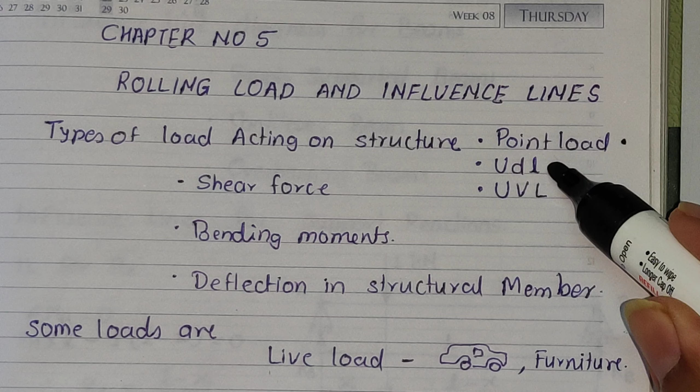Load. UDL, that is uniformly distributed load, right? Load of the tiles, right? That is uniformly distributed load. And UVL, the load whose intensity varies from one point to another point, that is UVL, uniformly varying load, right?

So because of such type of loading, there are different types of reactive forces acting on a beam. In fact, these are the different types of reaction forces induced in a beam, such as shear force, bending moment, and deflection of structural members. Because of loading, that member or beam gets deflected, right?

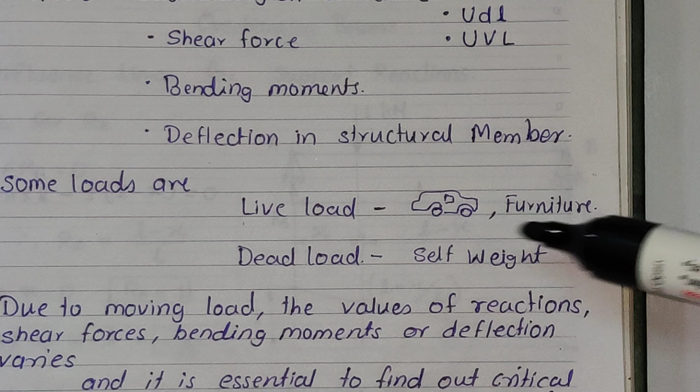Some of the loads are basically also classified, as you can see here, as live load, such as load carried by the vehicles, furniture, etc., and dead load, that is the self weight of the structure itself, right? So again, these loads are classified into two types, live load and dead load. So let us see next.

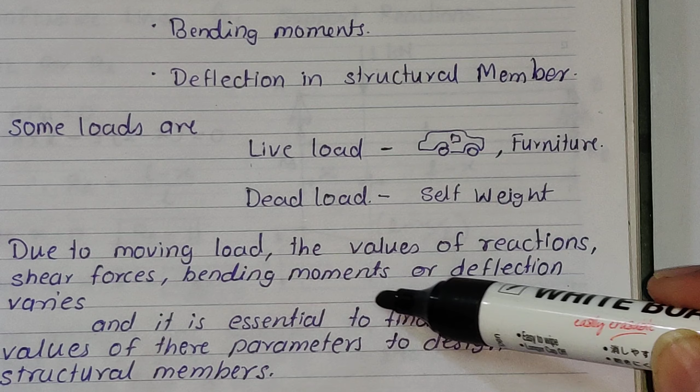Due to moving load from one point to another point, the value of reactions, shear force, bending moment, or deflection varies. Means these values change from one point to another point, and it is essential to find out the critical value of these parameters to design safe structural members.

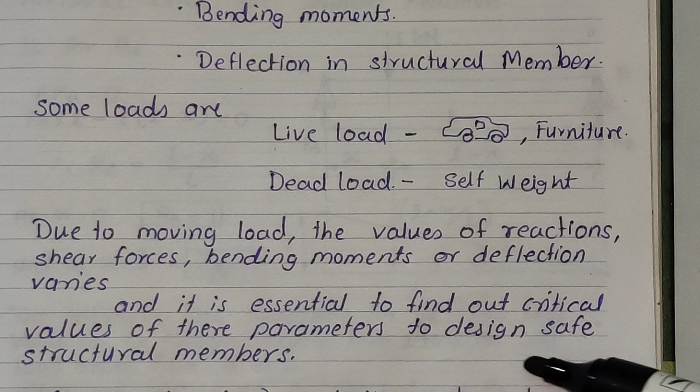So influence line diagram, अभी देखेंगे हम influence lines होती क्या है. As you can see here, influence lines, right? Influence lines or the influence line diagram, these represent the changing value of

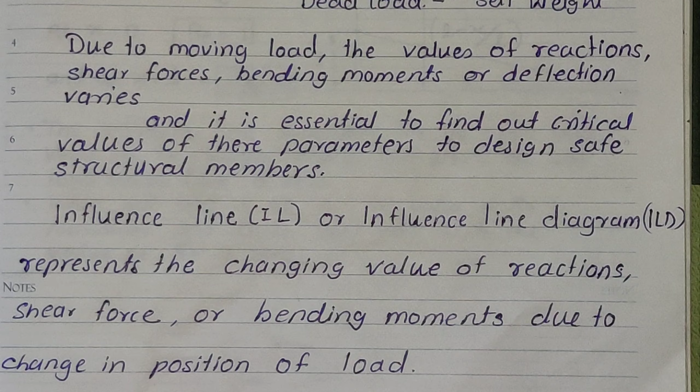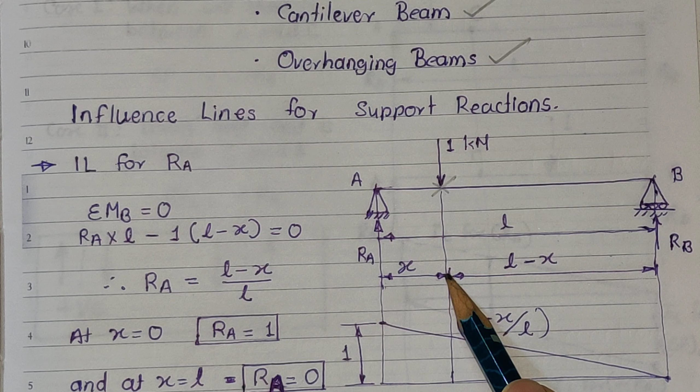So let us start one by one. So now we'll see the influence line diagram for the simply supported beam. As you can see in this diagram, the beam is simply supported. One end is hinged, another end is roller supported, and unit load is acting at a distance x from point A. Right? Total length of beam is L. So if we assume this distance as x, then the remaining distance will be L minus x, right? So this is unit load at this point.

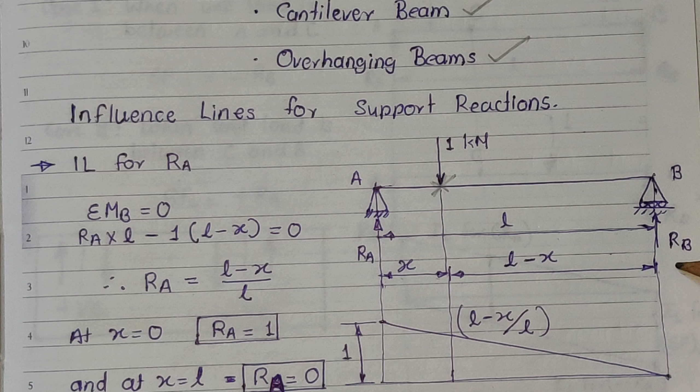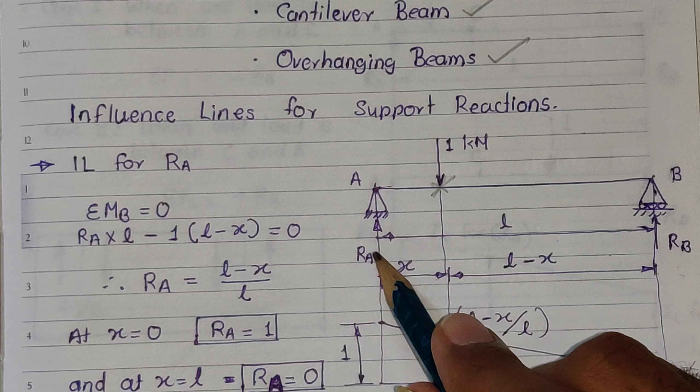Influence line for RA, influence line for reaction RA. At point A, reaction RA. At point B, reaction RB, right? So first you find the value of RA and RB, that is support reactions, by applying the equilibrium condition. Summation of moment of forces about point B is equal to 0. Take moment of forces about point B.

So you will get plus RA into L, right? As you can see, plus RA into L. This is clockwise moment, so it is positive. Minus 1 into, this is anti-clockwise moment, right? So minus 1 into L minus x, this distance is L minus x. So take this term towards the right side. So L minus x divided by L. So this is the value of RA.

So we'll see at x is equal to 0. When x is equal to 0, जब x is nothing but, as you can see in this diagram, where this unit load acts. Means here we assume that x is equal to 0.

That means unit load is at point A. Unit load is at point A. So in that case, as you can see here, put x is equal to 0 in this equation. So what will you get? L gets cancelled. Answer is 1. So you will get value of RA is equal to 1.

And similarly, at x is equal to L. At x is equal to L, matlab x is equal to L means that unit load is at point B. Unit load is at point B. As you can see, x is equal to L. L minus L is equal to 0. 0 upon any value is 0. So you will get value of RA. This is what RA is. RA is equal to 0.